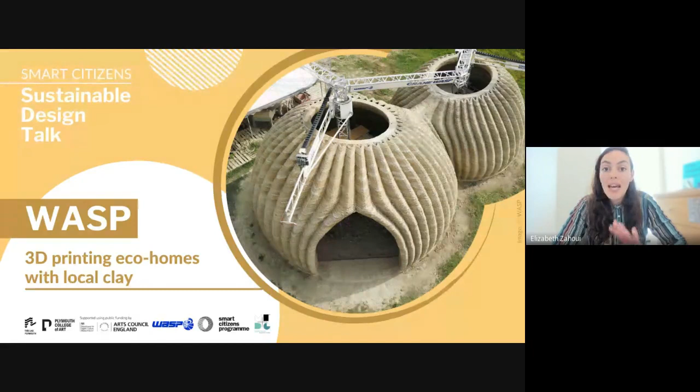So the way it's going to work for this talk is basically Lapo is going to tell you more about different aspects. So the design aspect of the TECLA house, which you can see on the screen, and you've probably seen it on the flyer when signing up for this event. And then he will also tell you a little bit more about the making process, so the 3D printing aspects and the use of local clay and local materials. And then he'll tell you a bit more about cultural and open source projects that the WASP team is involved in. And then after that, we'll have a comfort break of 5 minutes, and we'll come back and have 30 minutes for a question and answer session.

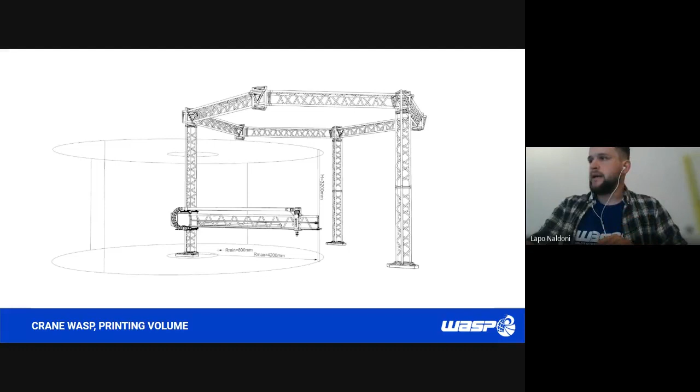So we decided to go back and take inspiration from the crane, the normal crane that you can see in all the building sites. And by this inspiration, in 6-7 months, we realized the first version of the Crane WASP, which is very similar to this. This is the machine that currently we use in the building site. And it is a modular machine, so it's very fast. We can create the setup for printing in half a day, and it is possible to close the machine inside a small container, and it's very easy to transport that machine.

And in another container, we develop all the stuff to start from the soil and go to a printable paste. And to do this is not very easy. We worked a lot in these years. And yes, we start from the excavation of the building site. And first of all, it's important to have the right soil in the building site. Not all the soil in the world is good for this process.

We are working to create a setup able to be adapted to different conditions. But yes, I want to be clear. Nowadays, it's impossible to print with soil everywhere. But when it's possible, we start from the excavation, and we have to dry the material after the excavation. And by using a disc screen separator, we obtain a homogeneous granulometry of the soil.

It is very important when you have to print, because it is needed, because otherwise you could have a lot of problems with all the parts of the 3D printer. And when we have a homogeneous soil, we start the mixing phase.

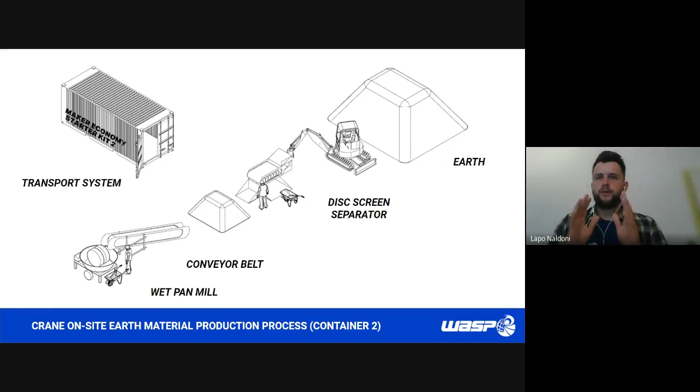So for the mixing, it is super strange, because in our process we are frequently involved in a sort of strange paradigm, because we have high technology like 3D printing and low technology like the whole techniques related to earth construction. So for mixing, we use the wet pan mill. In Italian it is molazza, and it is a super old machine, a Roman machine, a sort of mill, but it's the best way to have a super homogeneous material for 3D printing.

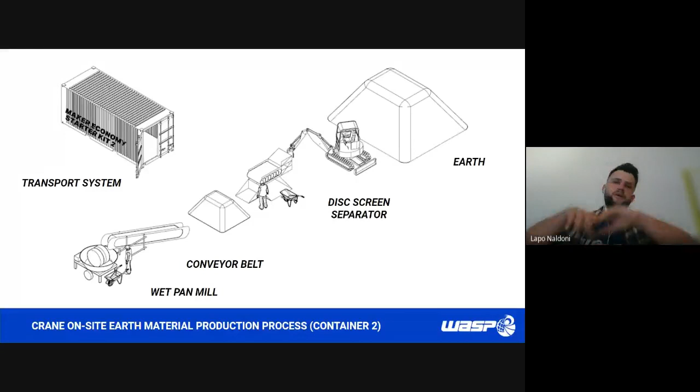In our mind, we have to totally remove this part, but in the mind of Massimo and in our mind, doing is more important than thinking. So if we want to do something, now this is the only way to do it. But yeah, we know that we have to remove this chemical additive just to be more green and more in line with our planet. But yes, this is the start. We use lime to stabilize the soil, so it's not the worst material in the world, but we want to remove it. And in the first container, we have the crane.

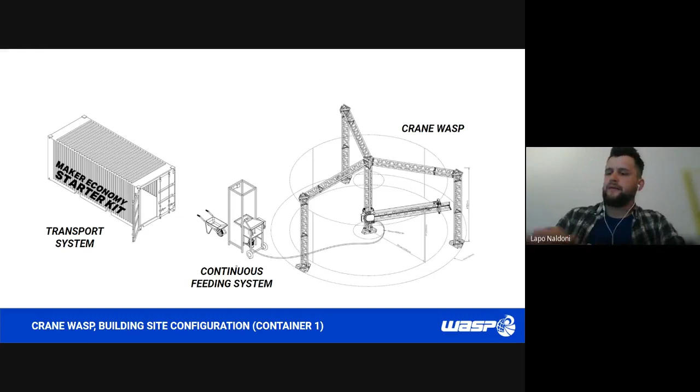So inside the first container, we have the crane system and the continuous feeding system, that is a pump able to pump all the material for architectural scale. So if it's needed because the client wants it, we can pump concrete. Otherwise, if the construction is for us, we pump other kinds of mortar like soil-based paste.

And the crane, I think the biggest feature of the crane is that it is a modular system, and we could use more than one printer together, so it is multi-nozzle printing. And this is a very good option if you want to go very fast, because you are not limited to only one nozzle in all the printing area.

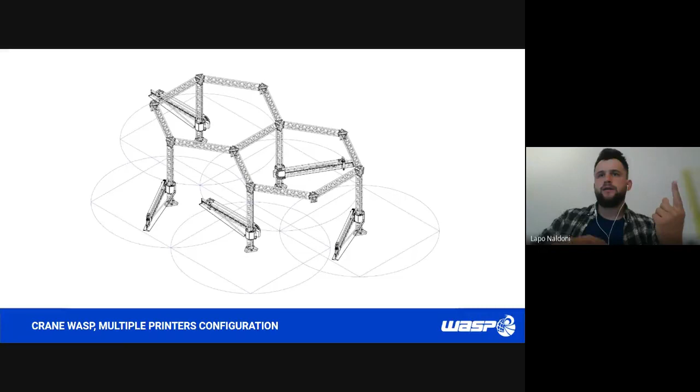Because normally when we think about 3D printing, we think about a very small machine with a nozzle of 0.4 millimeters. In this case, you have to imagine that you are using a nozzle of 30 millimeters, and you are printing a cubic meter of material. So it is very important to have multiple printers, and if you have a problem with one printer, you could print with the other one, so you never stop the building site.

Just to show you something about what we have done this year, WASP doesn't develop only machines, because it's very difficult to show the potential of the machine if you don't print anything. So my team is tasked with showing people that it's possible to create a new kind of architecture, more biological. So Gaia is the first construction of WASP, and it is very close to our facilities. And this is the start of Gaia.

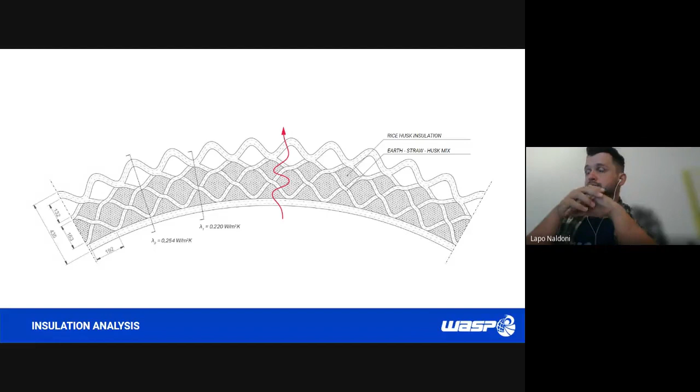So we started by trying to find the best toolpath for our machine, because it's a super beta version of the crane. So we had to understand which is the best toolpath for the machine. And this is the result of some months of research, and we decided to create a wall with multiple functions. So we embed inside the wall the ventilation system you can see in the upper part of the drawing. Inside we put the insulation, and to insulate the wall we use rice husk with a very small percent of lime to stabilize the rice husk.

The mice love the rice husk.

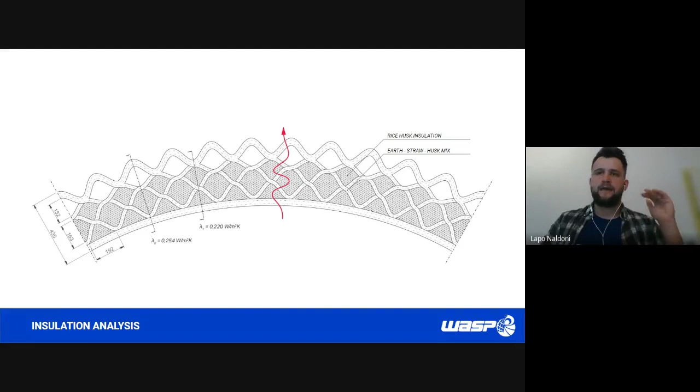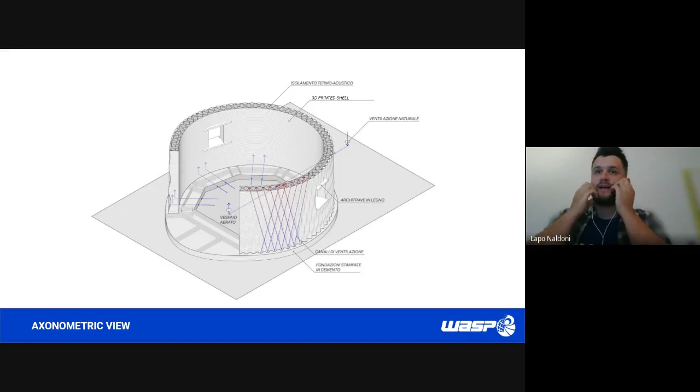And we made some tests for the transmittance of the wall, and it is very good. So we can imagine that if we create a normal house with this kind of wall, we have an A-class wall. So it is very good. And with this, we decided to create a shape able to cover an interior floor area of 20 square meters. At the time this is the maximum printable area of the machine, and we printed it in 100 hours. So as you can see in that design, we created a system to create natural ventilation along the wall.

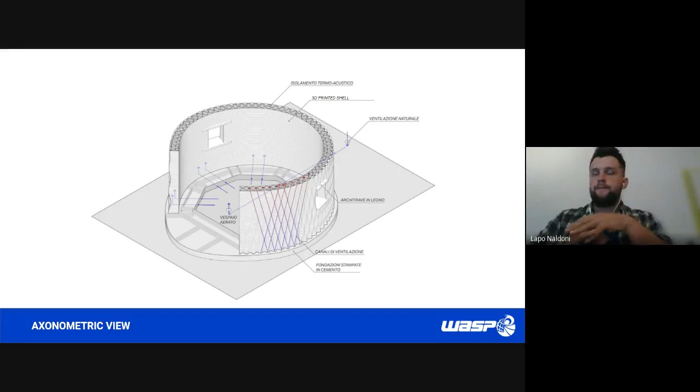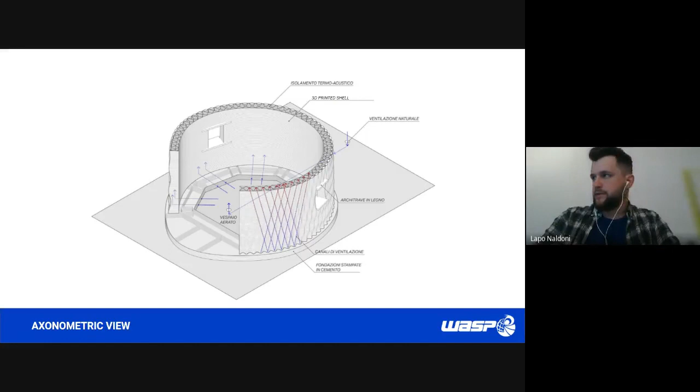So we take the air from the north; naturally there is a ventilation from the north on the base of the house, and when the sun warms the external surface of the wall, we have a natural ventilation able to cool down the interior temperature.

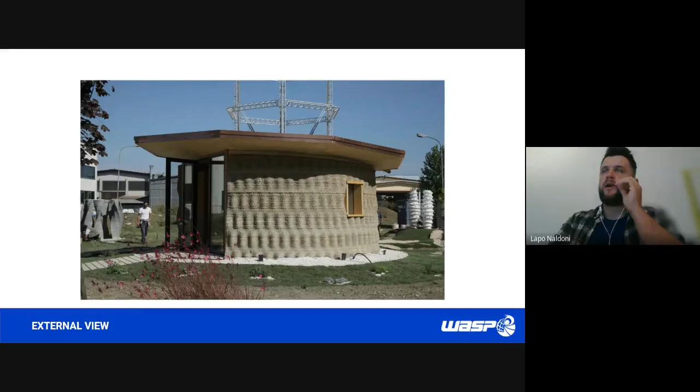And after 3 years, we are super happy to say that we have no problem. In that case, we used 4% of lime to stabilize the clay. And the wall is perfect. So we have no problem in this architecture after 3 years. We are super happy with the results.

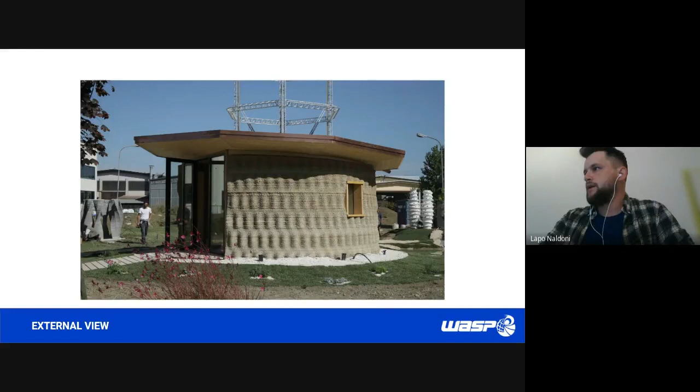And the project that we have been involved in for the last 2 years is TECLA. To make this project, we have a lot of partners. For Gaia, we worked in particular with Rice House, an Italian startup that creates material using waste from rice production for the architectural scale. And in this case, we have a design partner, MCA, Mario Cucinella Architects, one of the biggest Italian studios. And for the research, we have SOS.

For the material, we have Mapei, one of the biggest chemical companies in Italy. Milan Ingegneria provided the structural calculations of TECLA, and a lot of other companies helped us arrive at the final step of TECLA. To do this, we started, as usual, from the material.

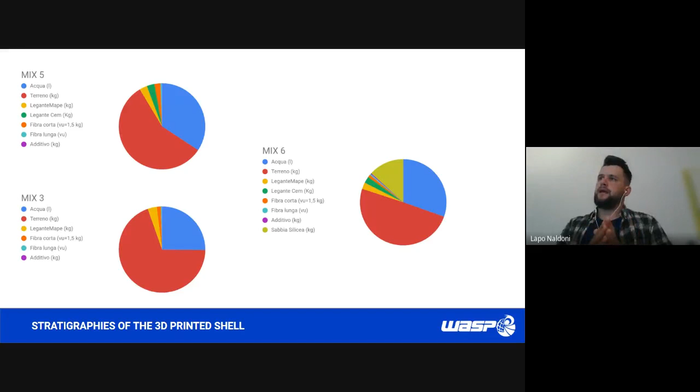I'm sorry because I don't know why, but I have the Italian version of these infographics, but I can explain. The red part is soil, the blue part is water, and the other parts, the yellow, the dark green, the orange, are the chemical part.

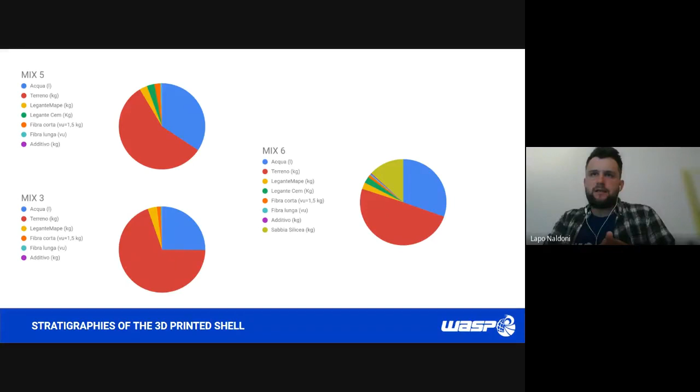Only in mix number 6 can you see a big green part related to the sand, because our soil doesn't have a large quantity of sand, and we needed to put it in the mixture to reduce the shrinkage of the material, because if you want to naturally reduce the shrinkage after the drying process, you need to use an aggregate like sand.

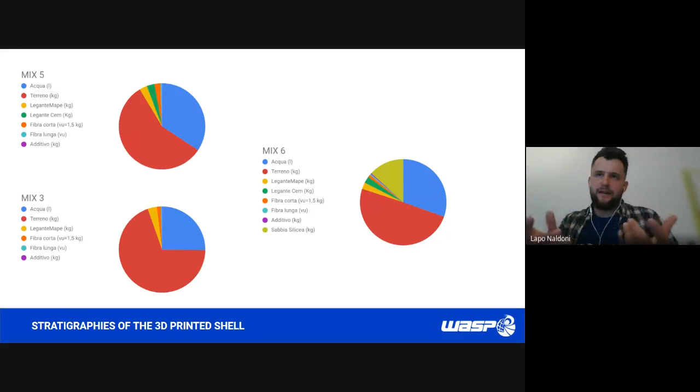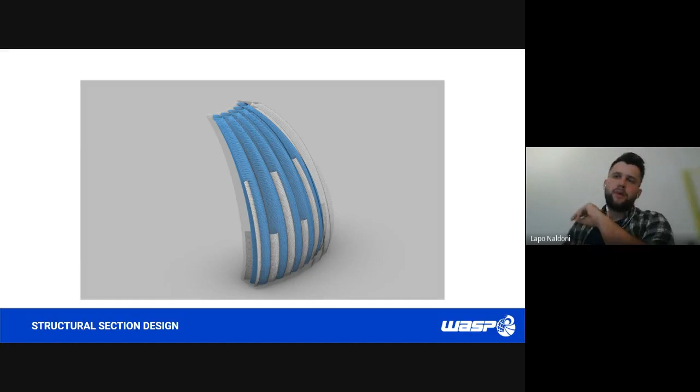After that, we started working with the engineer to understand the best solution to create a dome, the best structural section for a dome. And we decided to work this way. As you can see, for the calculation, the engineer used only the blue part of this design. The white part is more related to the 3D printing. Here you can see 3 different sections: bottom, medium, and top.

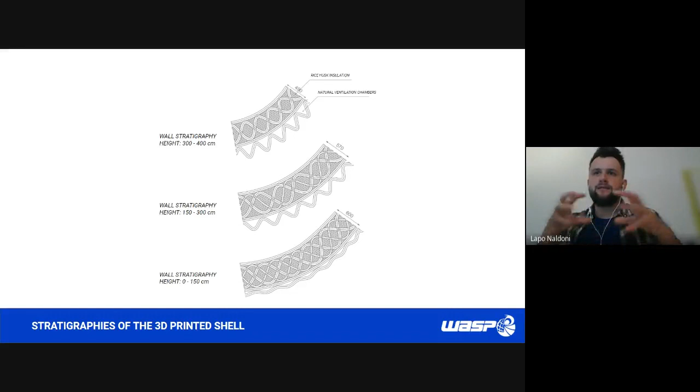As you can see, we reduce the material from the bottom to the top. This is possible thanks to 3D printing, because you can change the quantity of material with the infill percentage, as Cura or Simplify3D call it. In this case, we don't use software like this. We made all the toolpaths for TECLA using Grasshopper, because it is great software and it is free. So I like it. And with this, we reduce the material.

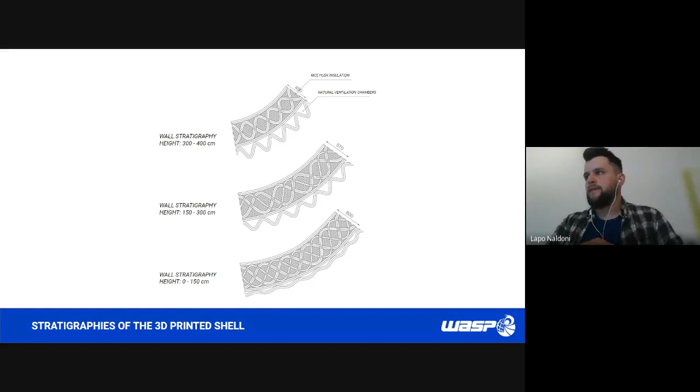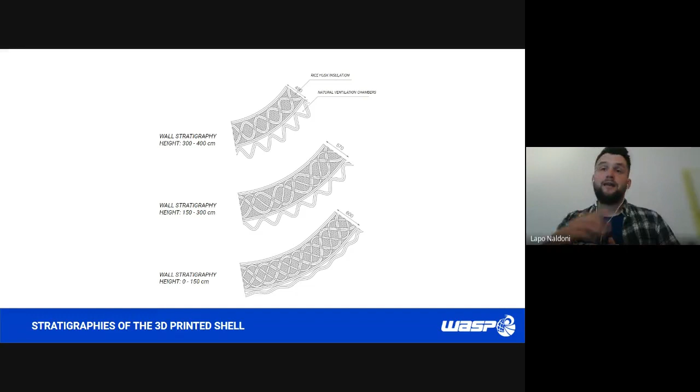I don't know if you know the Pantheon in Rome. To reduce the weight of the material from the bottom to the top, the Romans changed the type of aggregate. They started from stone and arrived at pumice, a lava stone, super light. In our case, we reduce the material, so we reduce the number of shell toolpaths inside the printing toolpath. And the other part is filled with rice husk, as in Gaia.

3D printing in this is very, very beautiful because you can scale everything. I can scale this toolpath and reprint it at a small scale and see a lot of super interesting things.

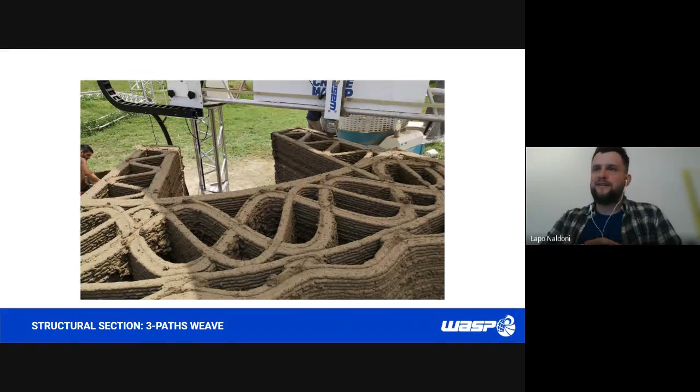So in that case, this is the step when we go from inside WASP to outside WASP to test. As you can see on the left, there is one of my colleagues, super confident with the pump. After the printing phase, we tested it for 1 year under the action of the climate, to understand if it's possible to have a structural wall made using soil outdoors without a timber structure over it.

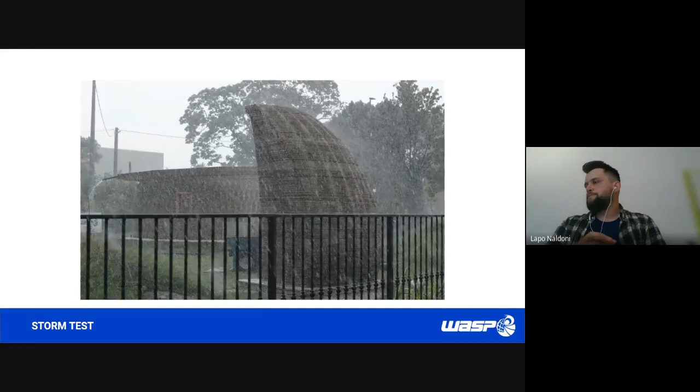To create a sort of hydrophobization of the surface, we use a siloxanic product that is a hydrophobic product. It doesn't cover the surface. This material creates a sort of reaction that pushes out the water. So the water is very fast on the material, and the water doesn't have time to go inside.

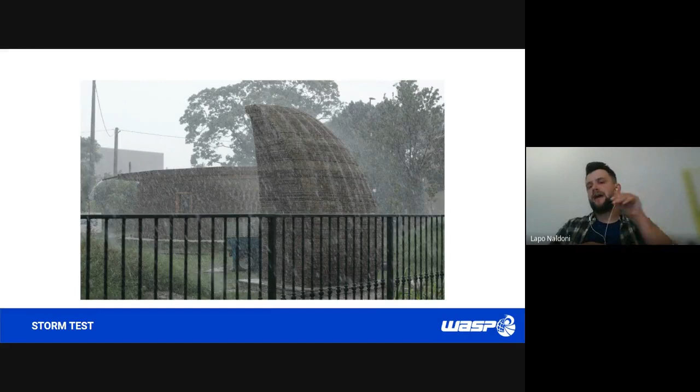So after that, the architecture studio immediately started to say, okay, it's possible. Now we have to create a village. And we said, no, okay, not the village now. We can start from one TECLA and not from the village. So we decided to start with TECLA 1 year after the mockup.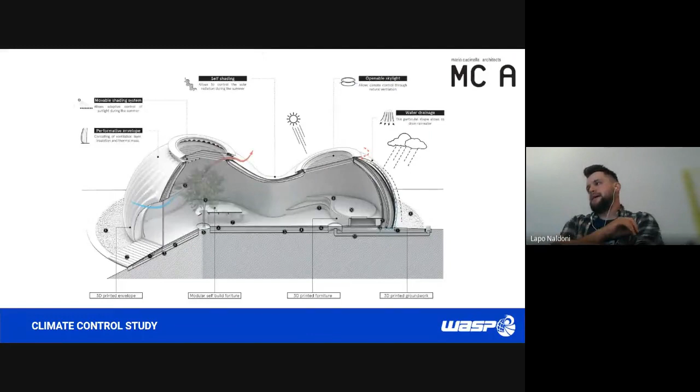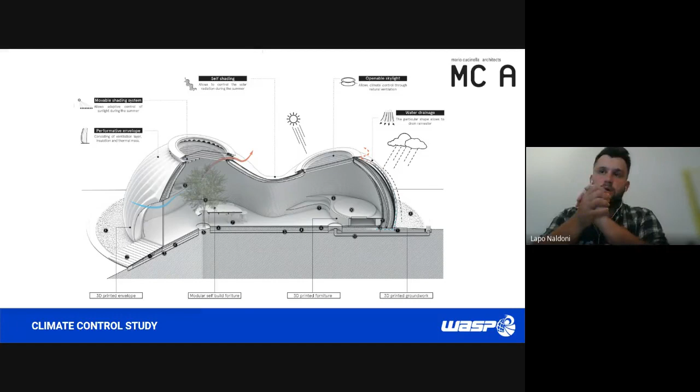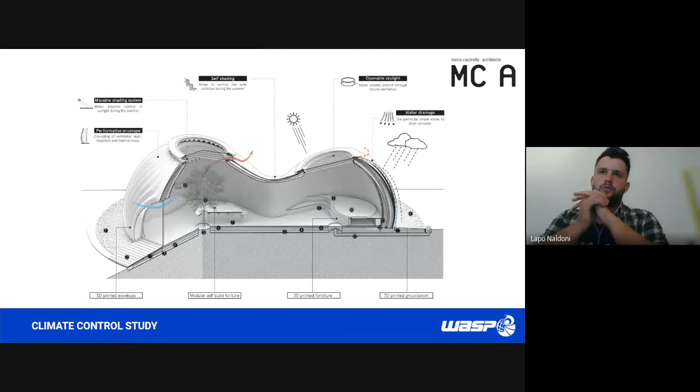And this is basically all the functions embedded in TECLA. As in Gaia, we try to put all the needed functions inside the wall. So we have ventilation, the structural system, and the design system, so in which way we want to create our interior experience.

Here there is an infographic just to show one more time that our work is divided into high tech and low tech. On the left, you have the high tech part that is reusable. The window, the furniture, the door are all reusable parts, made using glass and wood. On the right, you have the biodegradable part that is made using soil. So in this case, high tech and low tech is related to the material.

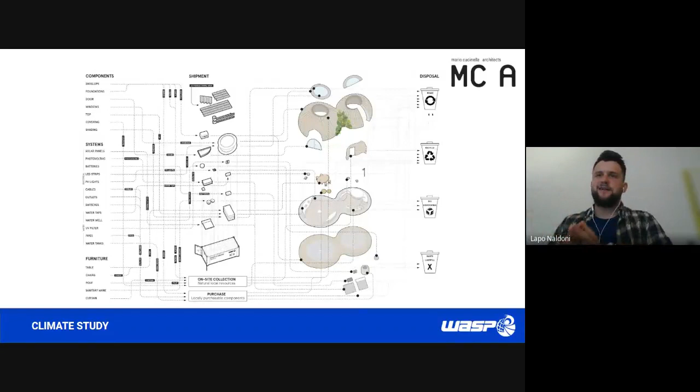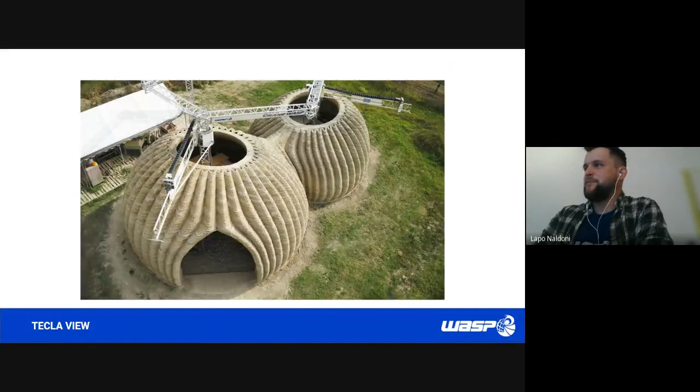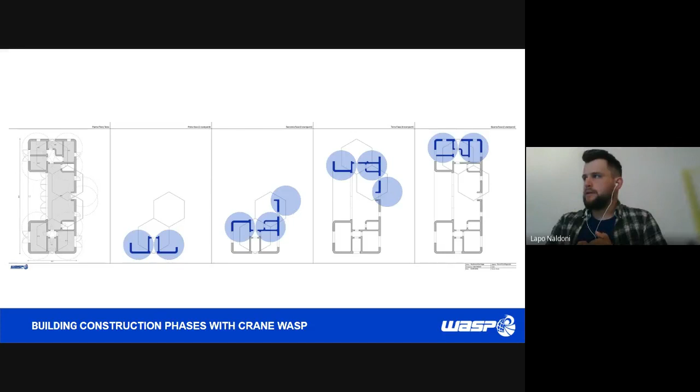We aren't inside WASP now, as I said with Elizabeth previously, because now we are on a building site in the middle of Italy, and we are back to square walls. This is the project that we are printing now, for a client that wants his house. We use a lot of big machines, because now there is a lot of material. We print 50 cubic meters of soil in that project, so we need big machines to move all the soil that is needed.

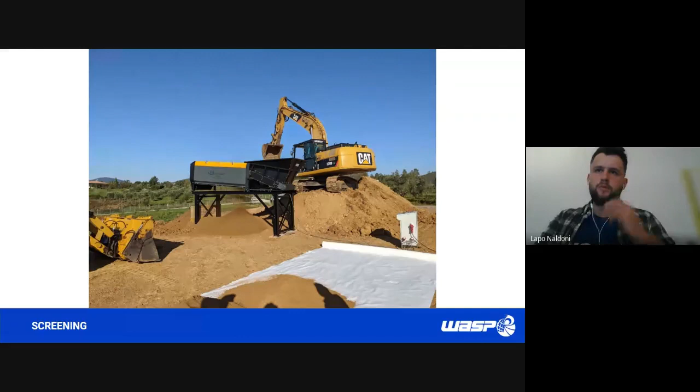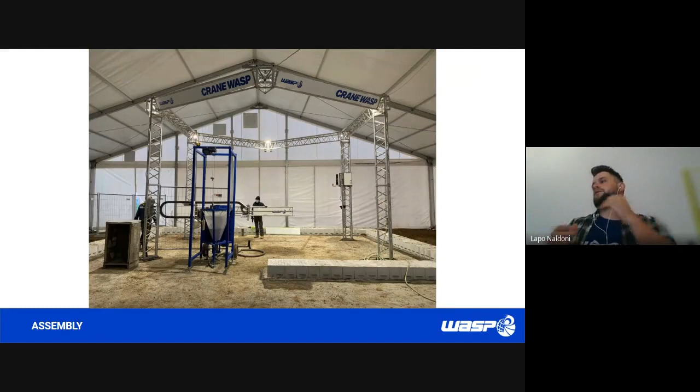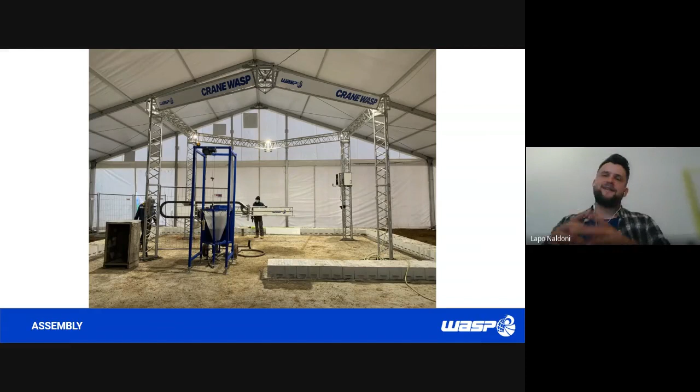We use the maker economy to move our crane, so the process is the same that I showed in the infographics at the start of the presentation. We started printing for this project in January and February, so we need a cover over our machine, because it's very difficult to print. It's not as difficult as in England in winter, but it's difficult in Italy too.

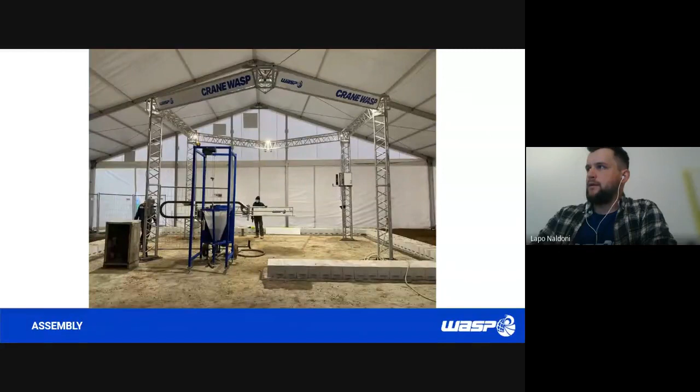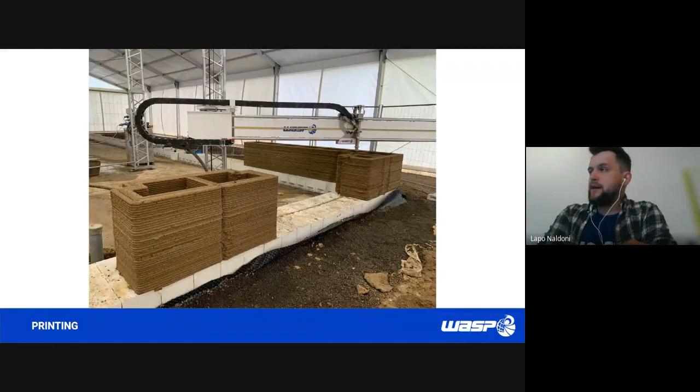So for the first time in our experience, we print with the crane indoors, and we started printing the wall of the house. It is a wall with incredible thermal performance, because we have a transmittance of 0.18, so it is very good.

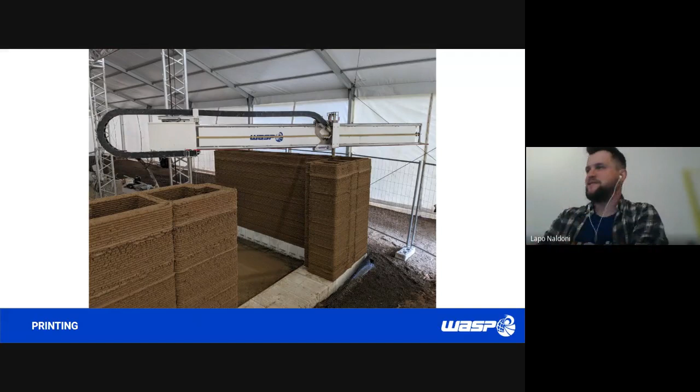And yes, I hope to finish the building site next week. So next week I'm back here to close the last part of the work. This is not public. This image is only for you at the moment.

Okay, I started with my field of research, but now I want to show you more about what we do in WASP, because we are not only houses. As Massimo frequently says, we are not so crazy to think we can work, but we are crazy enough to work for it. So every day Massimo tries to start new projects to help the world. And this is possible thanks to an incredible team, because we have grown over the years, and now we are around 40.

And our fields of research is this. We start from the food, because for Massimo, obviously, if people haven't food, it's impossible to do nothing, no? After that, if you have food, you need a house. And after the house, you need the health, the energy, the work, and finally, but not finally, art and culture. Massimo said that art and culture is the base for all.

I think that Massimo put art and culture very close to food, maybe because for Italians, art and food are very close. And yeah, this is our space. So this is where we work. Outside where Massimo writes Shamballa, now there is TECLA, and you can see here, you can see Gaia. This is the space where I work, that is the R&D part, and this is the part where we produce the 3D printer.

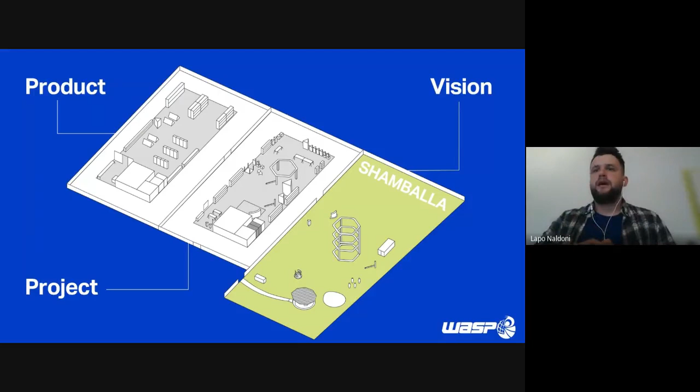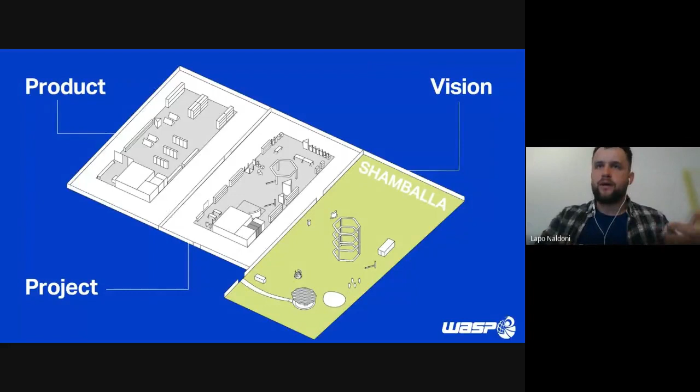So we have our vision, we have the project, and we have the product. It's a sort of circle, and if we have good product and we sell that product, we have the money to have a bigger vision. So it's a sort of continuous circle where we work in the middle, in my case. And to do this, we create a WASP hub network around the world. So we have a lot of network, not only in Europe. We have one hub in London, Arthur Mamou-Mani Architect, and others around the world, because it's very important for us to create a network.

We start from the open source. So for us it is the base to create a network of different ideas, to take the best to go in the right way. I try to explain more about the other fields of research in WASP. It is not close to me, but I know a lot of things about that.

Food. The first one is WASP Hortus, a project that I'm involved in, and is a column for hydroponic culture. And yes, it is super beautiful because it's a project developed in Rhino and Grasshopper, and it is possible to change the dimension of the column and the number of the cavities to put the vegetables. So it's a totally custom project, and you can modify what you want and print it.

So by using 3D printing, it is very easy to create a different configuration of the same logic, and it is adaptable to the different configuration of the house of the client that wants this. And to do this, WASP developed the Delta WASP 3MT, a machine able to print polymers at large scale.

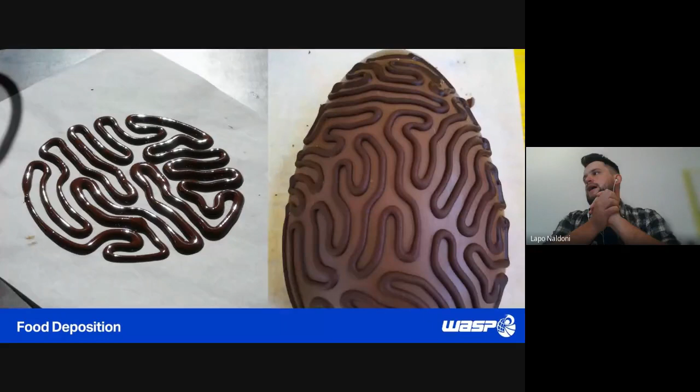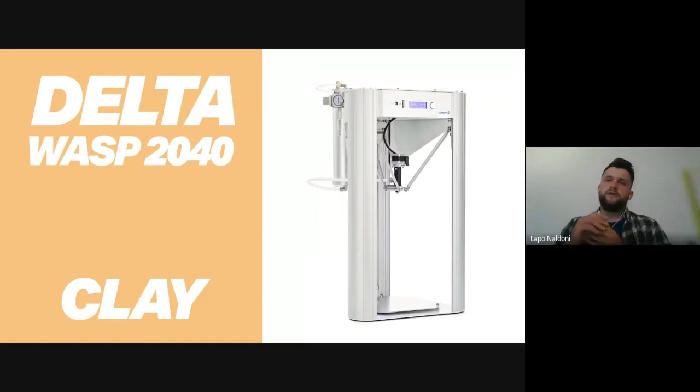In the food, we have a client that wants a 3D printer able to print chocolate, and in particular to print over the egg. So we develop a machine able to print chocolate in non-planar condition. And at the same time, with the same machine, we started testing if it is possible to print biscuits. So the machine is this, it is born to print clay, but we understand that the food pastes are very similar to the clay, and we start to modify that machine to print food.

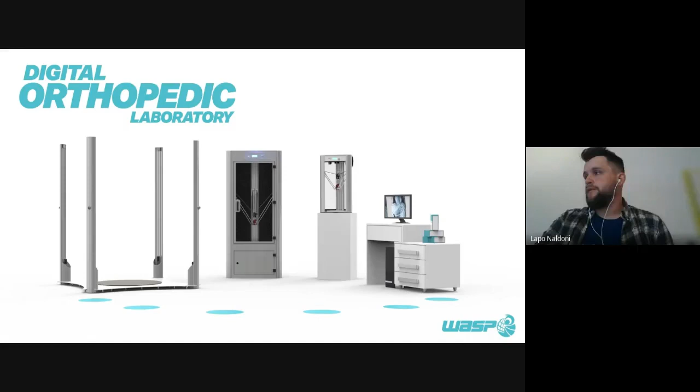On the side of the health, we develop the digital orthopedic laboratory, first of all. And with this, we develop in Blender, another open source software, with Alessandro Zomparelli, the WASP Med add-on for Blender. It is an add-on made to give doctors the possibility to design what they want, because nowadays a doctor doesn't have all the information to go on Blender and create a 3D model. So we use this add-on to simplify Blender for a doctor, and to give doctors or technical medical people the possibility to work on this super software and create printable models.

And with this, we create that first test, but now we have a lot of clients that use our printer to create body braces. And during COVID, as all the people in the world, we needed face masks. So with the same add-on, we realized a special feature to create your own mask. So if you scan your face with that add-on for Blender, you can design your face mask so that it perfectly fits your face, and realize your mask in 2 hours.

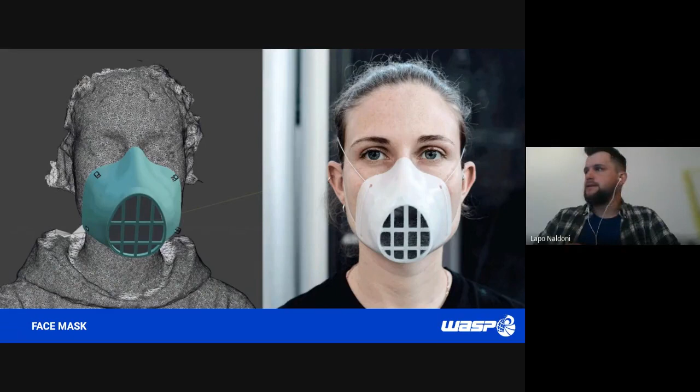We printed a lot of them for the municipality of Massa Lombarda, the place where WASP is based, because at the beginning of the pandemic, we didn't have face masks. So a lot of people like policemen and other super important people for the municipality of Massa Lombarda needed the face mask. And we used this to help Massa Lombarda. And to do this, we use the Delta WASP 4070, a machine able to print technical material at large scale.

We made a present to the hospital of Damascus in Syria, and we gave them one of the 3070, and they use it to create orthoses and prostheses for people that need it.

In the energy side, we have a lot of ideas, but for Massimo, it is very important to use one low-energy material, so to recycle plastic, because Massimo said we use a lot of energy to create plastics, and it's important to use that plastic not only one time, but to reuse it as much as possible.

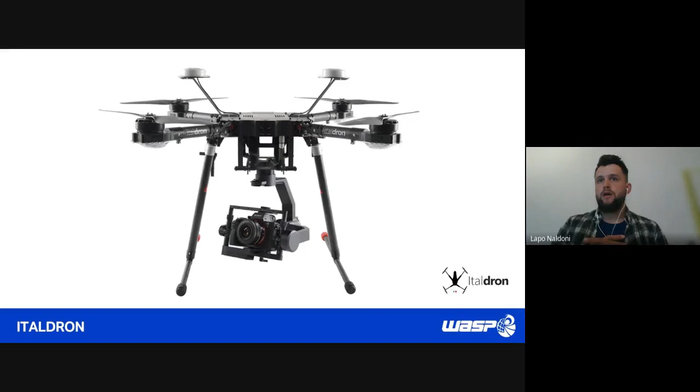And in other cases, like Italdron, they use our machine to create a serial product. So our machine now is on the market to create a serial product, able to create a super high performance drone.

But one embedded information that I want to give to you is related to the fabrication process of this. Because Arthur created the design in London and used 5 WASP hubs to create this installation. So the design is made in London, but the fabrication is made in Madrid, Barcelona, Venice, and, I don't remember, in the middle of Italy, Urbino, I think. So the production is local, closer to Milan, and the design arrived from London.

So it is very beautiful when in the WASP hubs you have the same machine. It's possible to create the design in one place and the fabrication in another place. So only the information travels around. The fabrication is local. And another project with Arthur is related to the Burning Man Festival in 2018.

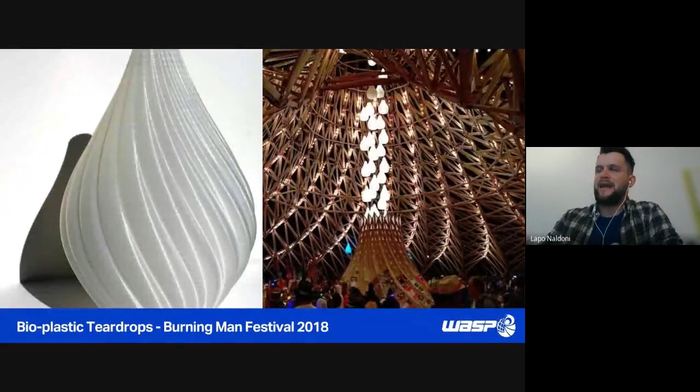And in particular it is related to the lamp inside the Galaxia Temple. And I was involved in this project because Arthur created the design in London for the first time. And I released the G-code in Massa Lombarda, in the WASP facilities. And I sent the G-code to Reno. So the fabrication is in Reno, the optimization in Massa Lombarda, the design in London.

And Arthur saw the lamp for the first time in Reno. So he never saw the final results. He only saw the final results super close to the installation. And in my opinion, this is super beautiful.

In the first stage, the machines were far from perfection. In the last part of the work, we were very close to having a very good machine. So as we frequently do, we develop the machine during the work.